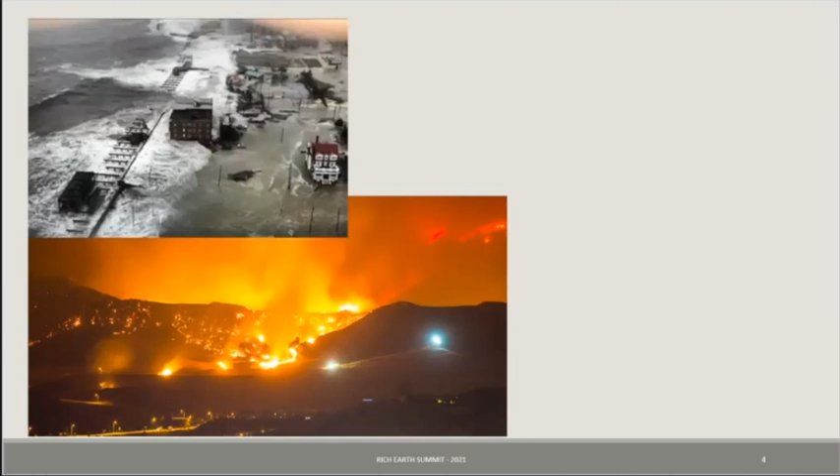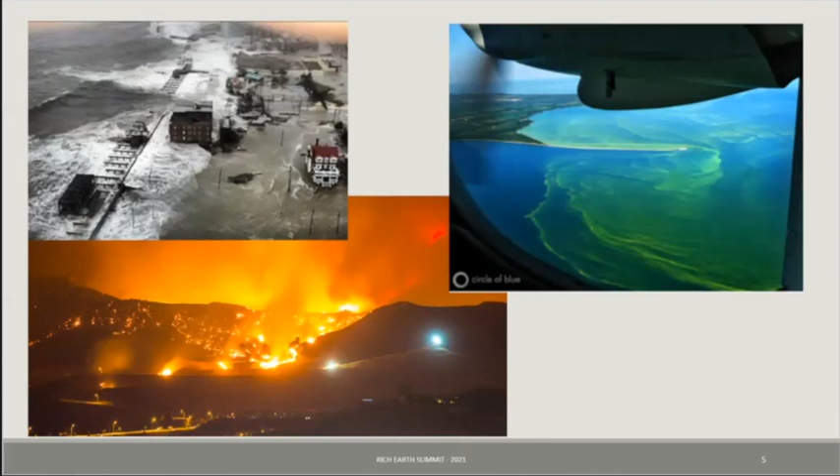And that of course stems from nutrients running off from farm fields, road surfaces, lawns, and from wastewater treatment, disrupting our fisheries, making it unsafe to swim, making it challenging for the drinking water. A number of years ago the city of Toledo had to completely shut down its drinking water because of the toxicity from these cyanobacteria.

And then you put this pandemic on top of all that. That has been disruptive for the way we work, for people's livelihoods, and has raised all kinds of uncertainty in our lives. And of course, we've lost many people. It's also put a new light on the wastewater sector and its role in public health, and how to use wastewater to help predict when coronavirus outbreaks are likely to occur, or where they're brewing.

We need to find solutions that solve for the complex equation all at the same time: for public health, for water scarcity, for nutrient balances, for affordability, for climate change. And that's hard. But I think the solutions that people in this group are looking at are in that vein of trying to solve problems without creating new ones.

So let me take a moment to put us in context of where we are starting from, at least in terms of our water and wastewater infrastructure. For most of the developed world, this is the way that we handle human excrement. And I want to be clear that I am not bashing centralized water delivery or sanitation. It has done a lot for humanity, and it is often cited as the driving factor that allows all of us to have cities and live in close proximity today.

Chlorination of city water and advanced wastewater treatment is what allows living as we know it today. But for all of its benefits, there are consequences, and we need to understand those consequences as we look for innovations that will solve some of these other problems that we have.

Now, let me explain this image we're looking at. On the left, you see the Deer Island Water Reclamation Facility, which serves the greater Boston area. I've got a map on the right of where that serves. The green and yellowish green areas are what's served by this wastewater treatment plant, also referred to as a water reclamation facility.

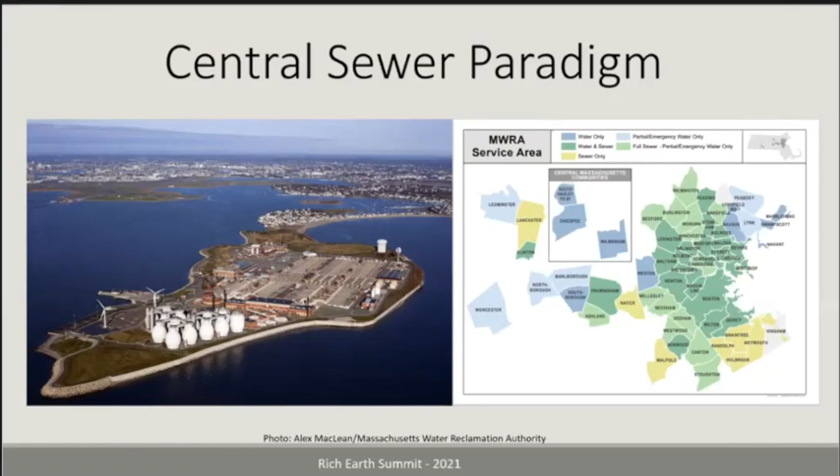On this image, Framingham's in the middle of the page, and that's about 30 miles west of this treatment facility. 30 miles is roughly, let me do my math fast, 45 kilometers or so, somewhere in there. And the treatment plant is out here. I don't know if you're seeing my cursor or not, but it's in the little part that sticks out into the water on the right side.

And it's kind of funny that it's called water reclamation, because in this particular case, this sits out in the bay, which eventually feeds into the Atlantic Ocean. And so the water is really kind of thrown away. What happens is that water in all parts of this sewer shed is pulled in primarily from groundwater and to some extent surface water, used in the homes and in businesses, and then it's sent out to Deer Island for treatment.

And because Massachusetts sits on the coastline, all that water then is put back into the ocean, where it's really, for all intents and purposes, unavailable. You'd have to put a lot of energy to get the salt and other constituents of the seawater out in order to give it back to people. So that seems like a waste.

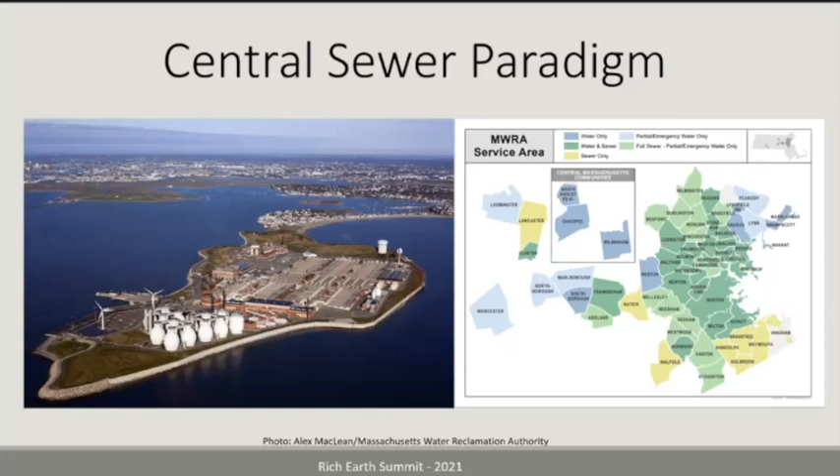Now, as I said, I'm not here to bash centralized sewer, but I do want to put in context some of the downsides of this, particularly around water, because I think that we're all people who share an interest in water. And I want to just drill into that a little bit. Now, here we see a very well-known image from NASA, and it shows we look like a water planet, with 71% of the Earth's surface covered in water.

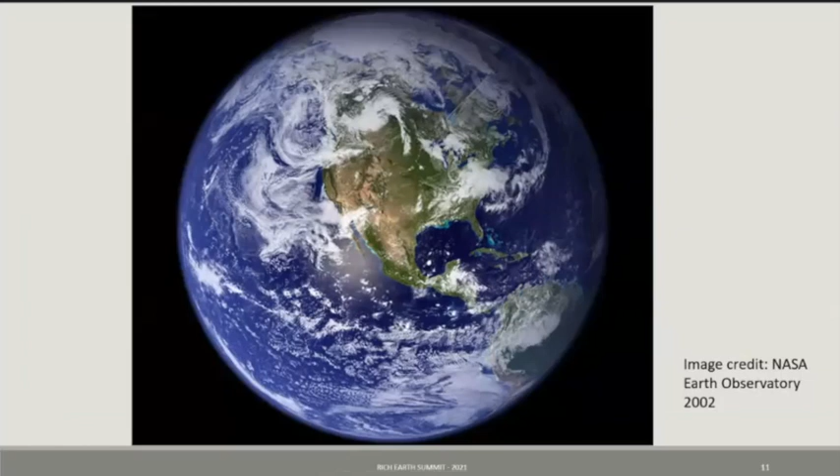But when you drill into that a little bit, and this image is from the U.S. Geological Survey, if we're thinking in terms of volume instead of surface area, it looks very different. The larger of those balls represents how much water by volume we have on Earth compared to the Earth as a whole. And that ball is about 860 miles or 1,400 kilometers in diameter. And that's all of the water on the planet.

The smaller ball to its right represents all of the fresh water on Earth. You can see how much smaller it is, but it would be a ball of about 170 miles or 275 kilometers in diameter. And then this little tiny speck below it represents the fresh water that is surface water and is available to us through rivers, streams, and lakes. And that little ball is only 35 miles in diameter, or about 56 kilometers.

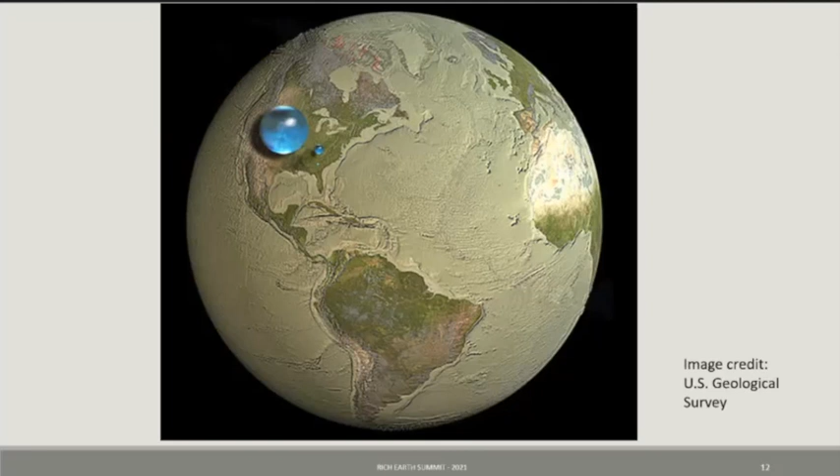In other words, yeah, we may be a blue planet, but there's not that much fresh water here for us to use. And it's just another way of driving home why we need to be so careful with the water that we use. And we need to question, do we want to use this precious water for transporting human waste, which is the way we use it in most of our cities today.

So just to summarize, some of the challenges with centralized water systems are, they disrupt the local hydrology, as I was trying to describe in that Boston example, but that's not unique to Boston. And of course, Boston and other places are working very hard to get that groundwater, what we call infiltration and inflow water, out of the system, but it's still there. This is a huge problem. It's sort of like in the US, we have this term called whack-a-mole, where you fix one problem and the next problem pops up.

So it's a never-ending problem of trying to keep that water out of the system. Large-scale transfer of continental fresh water to saline water bodies. And years ago, I saw a study that showed it is actually a measurable difference in sea level due to that transfer of continental fresh water, primarily groundwater, out to the oceans. It was, I forget exactly, half an inch or an inch, nothing compared to overall sea level rise, but it's measurable.

These systems are very energy intensive because we are pumping water long distances, and water is heavy. So that's true both of the water distribution systems and of the wastewater systems. And it uses a lot of water. They're built on the premise of having really infinite supplies of water. So that's a problem in a water-stressed world. They're very expensive to build, to operate, and to maintain.

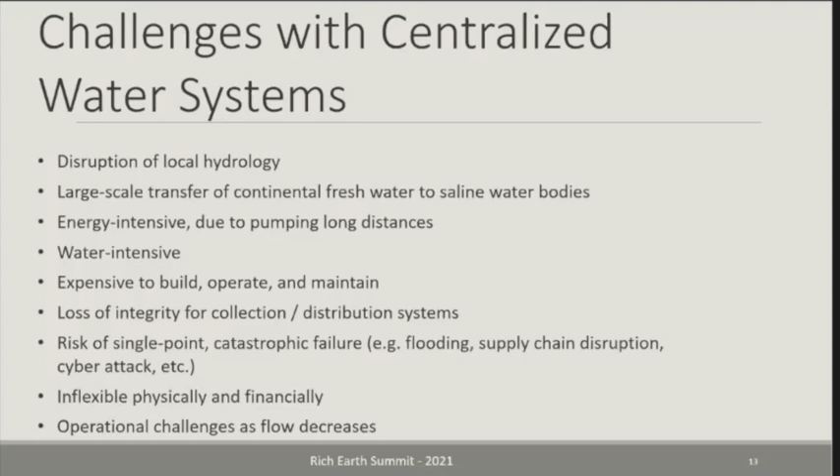We are also seeing, many of us predicted this for a long time, that supply chain disruption can have catastrophic impacts. During the pandemic, well, we're still in the pandemic, but in the height of some of the challenges with the pandemic, we saw communities in the United States and perhaps elsewhere asking people to conserve water because the ozone needed for treating water was needed at hospitals to create the oxygen for the COVID patients. So the ozone was in short supply, and we had a disruption of that supply chain. So COVID was affecting drinking water availability in a way that I certainly didn't predict.

Concerns about cyber attacks. This has already happened, where drinking water goes out because of a cyber attack. And certainly that could happen in the future. Just in general, these systems, because they're so big and they take so long to plan and so long to build, are really inflexible physically and financially. If you overbuild it, you can't downsize it. So people tend to build for a future that they anticipate, which doesn't always come through. And then the community is left holding the bag.

And now we are seeing that there are significant operational challenges in both water distribution systems and wastewater systems as the flow through them decreases. Water distribution systems are very dependent on maintaining chlorine residuals, and those chlorine residuals degrade over time. So if the water is sitting in the pipes for longer periods of time, it loses its integrity, and it may become contaminated.

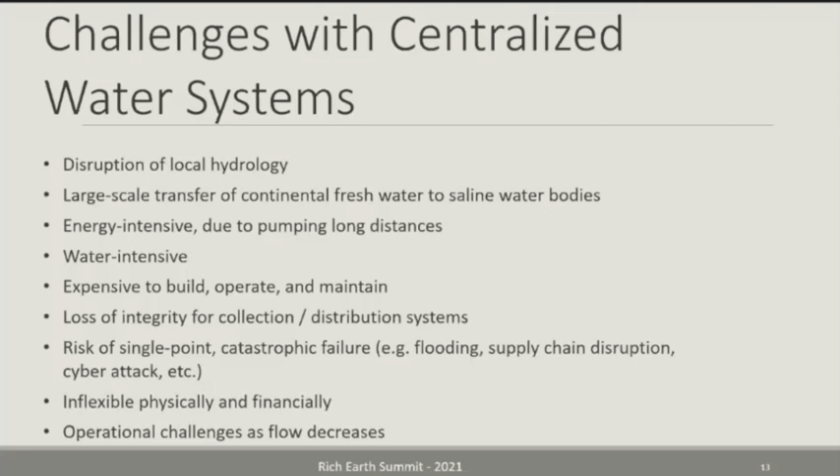In wastewater systems, we are definitely seeing challenges. I think these are good problems to have, but flow is decreasing because water use overall is decreasing, and we're getting more efficient. And then the wastewater stagnates in the system, and that can create system problems.

So shifting gears to think about how change happens and what is the change that's needed. Let me just give you some context for my background. In 2008, I had this incredible opportunity to go work for the Johnson Foundation at Wingspread. It's a small philanthropic foundation in Racine, Wisconsin, on Lake Michigan, about an hour north of Chicago. And they had what I would call a retreat facility. They don't like to call it that, but basically a facility for bringing groups of say 25 or so people together to work through problems.

And they have the money to bring those people together. And they had decided that they wanted to work on water problems. Now, you've got to picture 2008 in Wisconsin. Wisconsin has tons of water.

Water challenges are not really, it's not like living in California. And so it was kind of surprising in some ways that they chose to focus in on water, but they didn't really have a good sense of what the water problems were.

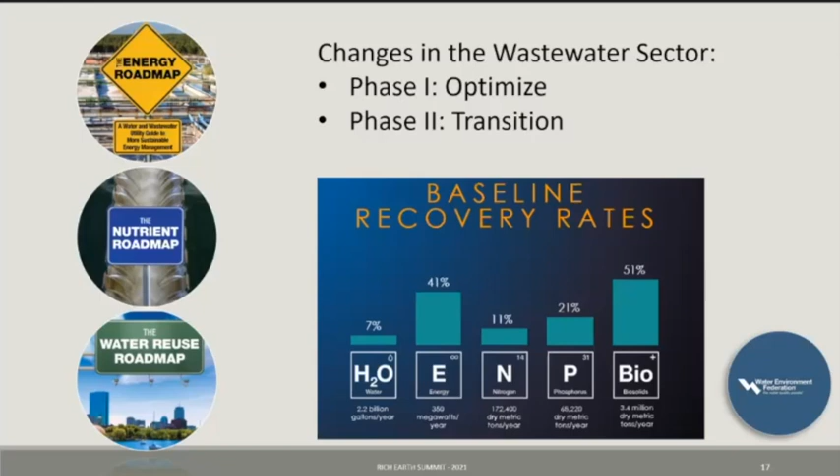And then starting to measure that. I'm not really going to drill into the particular numbers here, but the point is, if you want to do something, you've got to measure it. And so WEF has started surveying wastewater utilities on how much water, energy, nitrogen, phosphorus, and biosolids they are recovering from their waste stream. And the hope is that by highlighting these numbers and getting utilities to really measure this and report on it, that will help drive change.

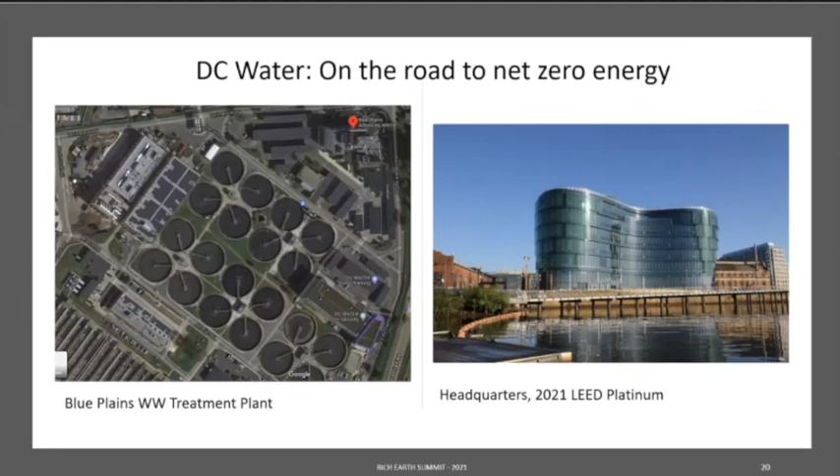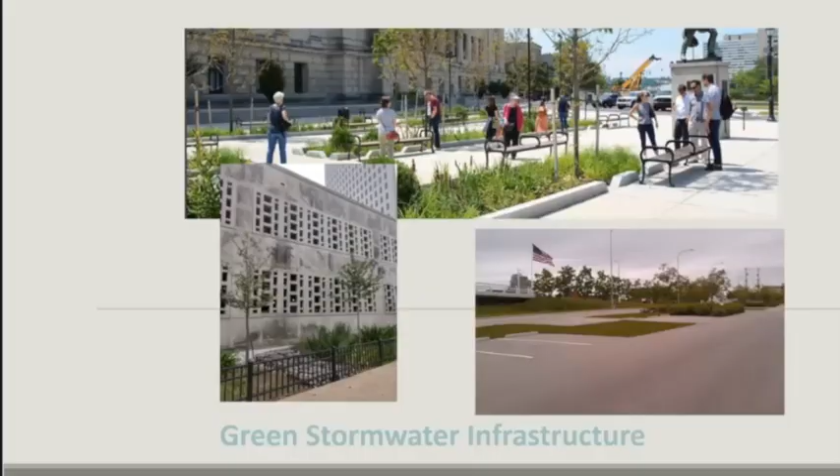And then at their new headquarters building, it's platinum LEED certified, and they've got all kinds of energy things there and water saving devices, including how to recover heat from their wastewater effluent. So my point is here that folks are trying to make change, and also, the use of green stormwater infrastructure, using natural systems to treat stormwater rather than sending that water to a centralized treatment plant. Just more examples of green roofs, green walls.

I put all of that in that kind of how to optimize the system. People are doing things, and that's good, and they will continue to do things, and they're being rewarded for that. But what are some of the things that are going to help get us into a new future that many of us are intrigued in seeing?

Well, there's been an increasing amount of work on what I call distributed water infrastructure. And the term is, of course, relative. Distributed compared to what? Distributed compared to centralized. And it can come in all kinds of sizes. A septic tank is a form of distributed infrastructure, or a rain barrel. But that's down at one end of the spectrum.

But in a community that maybe has 50 homes on septic, tying them together into one shared system, that might be centralized for them. But more and more communities are figuring out how to put some smaller scale treatment systems into their larger context.

And I want to use this time to kind of talk about terminology. I use this term distributed water infrastructure. Some people use decentralized to describe it. I prefer, and I know a lot of other people prefer, the distributed term, because I think it's really important that we not tee this up as one versus the other. Centralized is bad, distributed is good, or decentralized is good, because what that does is it sets up a false dichotomy and a false conflict between distributed and centralized.

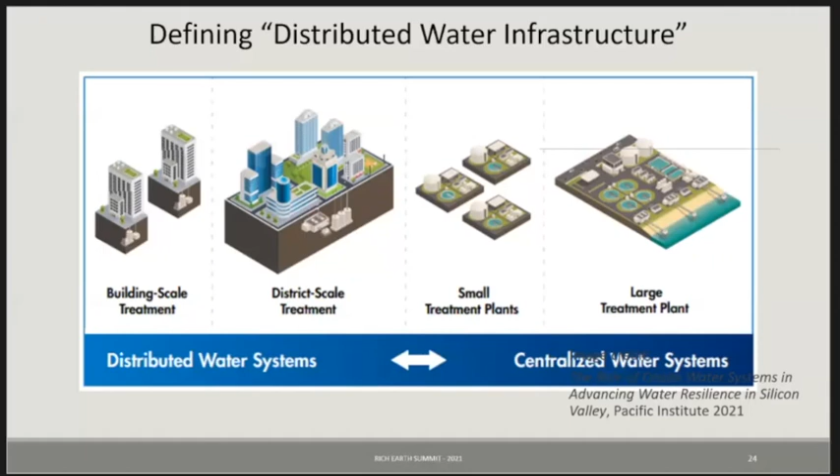Anyway, I just want to lay out this concept of distributed water infrastructure being a pathway towards the change that we want to see. There's been a lot of work being done in isolated pockets around the world. All my examples are US examples, but I know full well that there are other places that are further ahead. And I want to highlight what I consider to be the granddaddy of these systems, the Solaire building, the first residential high rise to be LEED Gold certified. As part of that, it treats its wastewater in the ground floor of the building. And this is really revolutionary.

I think we might have someone here today who is from or has worked with Natural Systems Utilities, who was behind this. This was put in place in 2003, and it has been working all those years, and now in New York City there are a number of high-rise buildings with these kinds of systems doing the treatment on site. They're still connected to the larger centralized system, but most of the treatment is happening in the building. The water is reused for non-potable uses, taking pressure off the collection system and off the water distribution system.

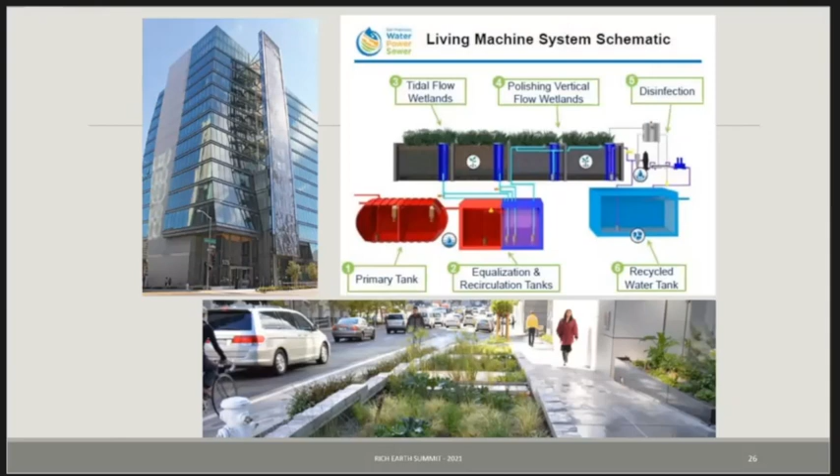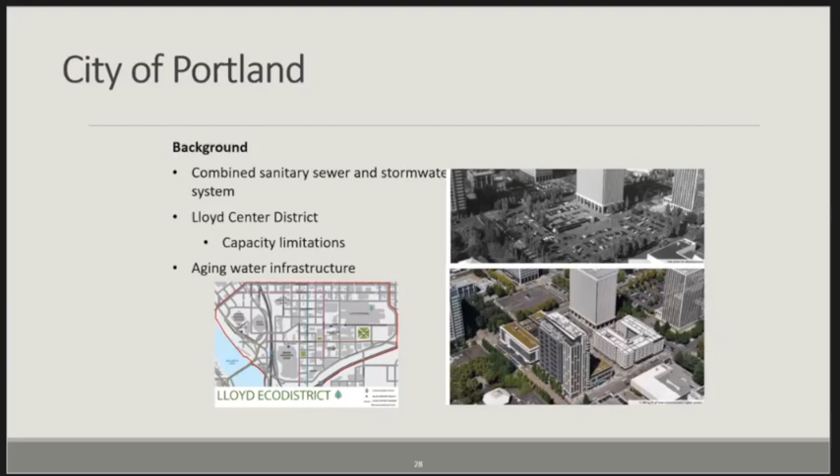So they worked with the developer and said, basically, we will give you a refund on your development fees if you build a system that doesn't tie into our collection system. This Lloyd Eco District resulted in a project called Hassalo on 8th, four city blocks, most of it had been parking lot. It now has three multi-use residential buildings, green roofs to help with stormwater, and these red systems are trickling filters that treat the wastewater with a series of treatment wetlands, taking care of virtually all the treatment and allowing water reuse on site. The solids are trucked to the main treatment facility periodically.

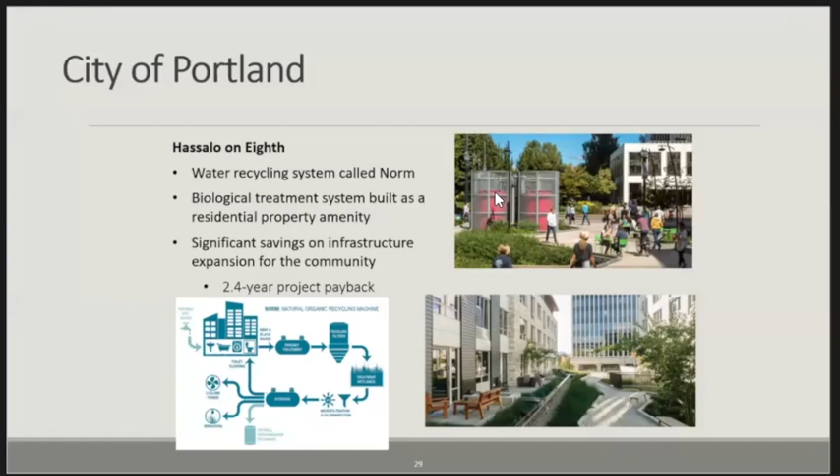So as you can see, it has a 2.4 year project payback. That was because it was in the city's best interest to encourage this type of development. I don't know to what extent we'll see this in other cities, but I think this is a really great example of how we're starting to see this sort of innovation in the context of a more standard collection and treatment system.

I also want to do a light touch with smart technologies. You may not think of all this digital stuff as water infrastructure, but it's a key component to allowing us to rethink the way we do water infrastructure, because if you have distributed systems, you can't have somebody on site paying attention to them all the time. As we increase our ability to monitor and manage from afar, that opens the door for distributed infrastructure. So how do we get to the stage of really transforming our systems?

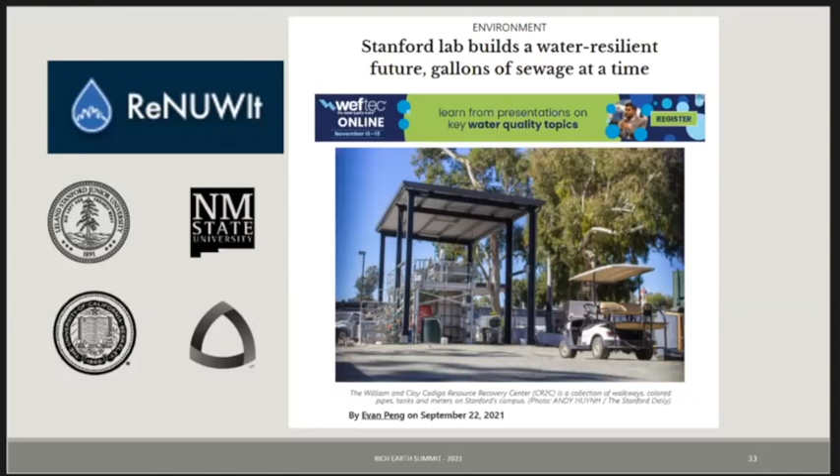There are entities out there that are really working on how to have a transformative approach to water infrastructure. And I highlight ReNUWIt, which is a collaboration of Stanford, New Mexico State University, UC Berkeley, and Colorado School of Mines. ReNUWIt stands for Re-inventing the Nation's Urban Water Infrastructure. And they have been going gangbusters in developing new technologies and new concepts, really helping us to reimagine how we could do water infrastructure.

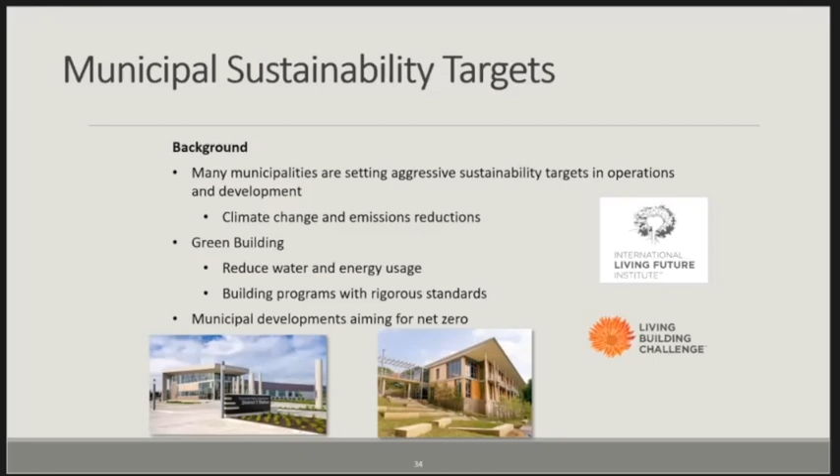Cities with sustainability targets are laying out more aggressive timelines for some of these changes. And so whether it's using standards developed by the Living Building Challenge or the International Living Future Institute or other similar paradigms to aim for net zero buildings, those are starting to really take hold of the imagination and help give cities tools for how they might transform their water infrastructure.

I use Austin. Austin is in Central Texas. It has a decent amount of rainwater, but it primarily relies on surface water for its water supplies. And it has just been growing like gangbusters for the last 20 years, and is projected to keep doing that into the future. And they have created their innovative Water Forward plan. It's their 100-year plan.

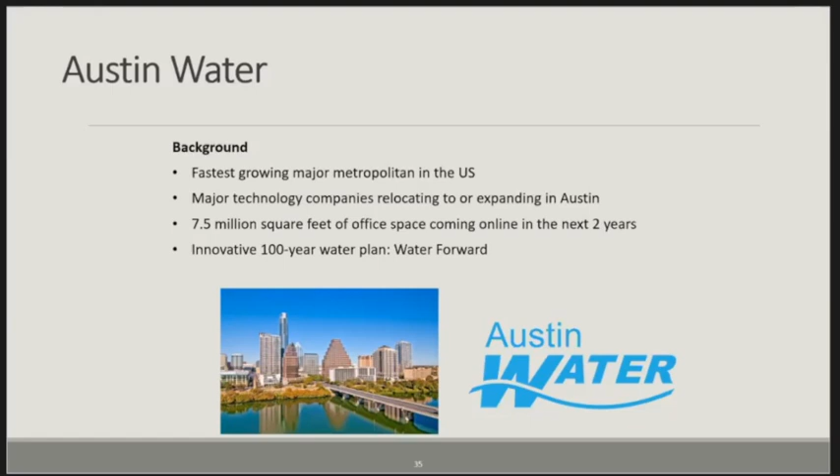They have set really aggressive targets for being able to recapture water from rain, from treatment of wastewater, from building drains, foundation drains, all those sorts of things, to really decrease the reliance on their centralized water distribution system. They see this as essential to their survivability. And when you get a plan like this that is so all-encompassing for a city, it's going to have transformative effects on how the water infrastructure overall works.

The Bill and Melinda Gates Reinvent the Toilet Challenge from 2011: the goal here was to create toilets that can handle human waste, can work off grid for very little money and little to no energy input. This has captured the imagination of inventors and innovators all around the world, and how we can really rethink our toilet.

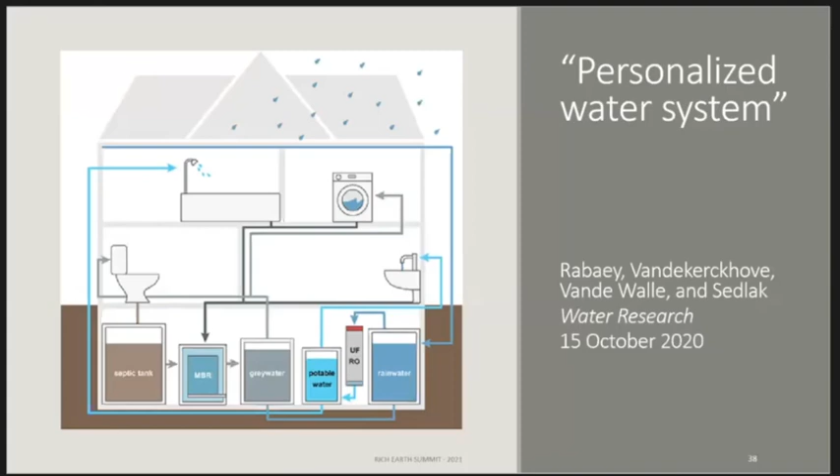David Sedlak and colleagues last year put out a concept, this personalized water system. It's really just conceptual, but this is one of the things coming out of ReNUWIt. And maybe we won't really be building houses just like this, but to get people thinking about how can you have a largely or entirely off-grid house, and do this not just for the people here who are sort of extreme innovators, but for the public as a whole. How do you make it easy for them, turnkey for them, so that they don't have to think about it?

How do we completely change the paradigm around nutrient recovery from wastewater? There are a couple of different technologies here, but this particular one recovers phosphorus in the form of this chemical brushite we see off to the right. And then they can sell that as fertilizer. In their case, it's really marketed at the general public rather than agriculture as a whole. But they are really rethinking how can we do that.

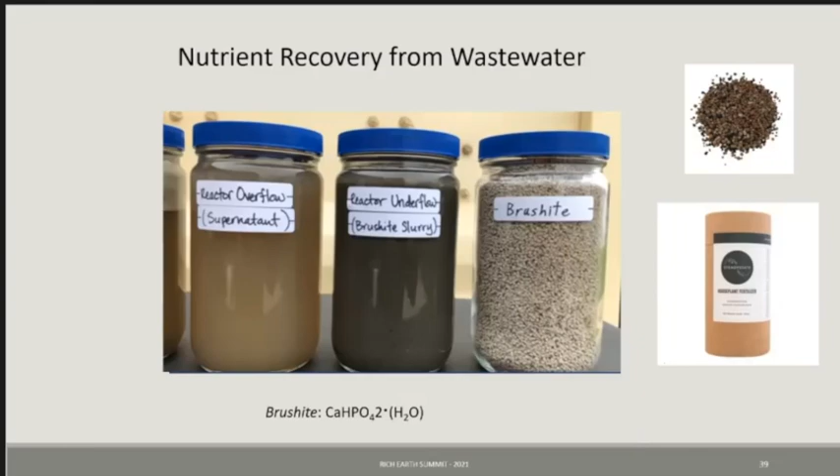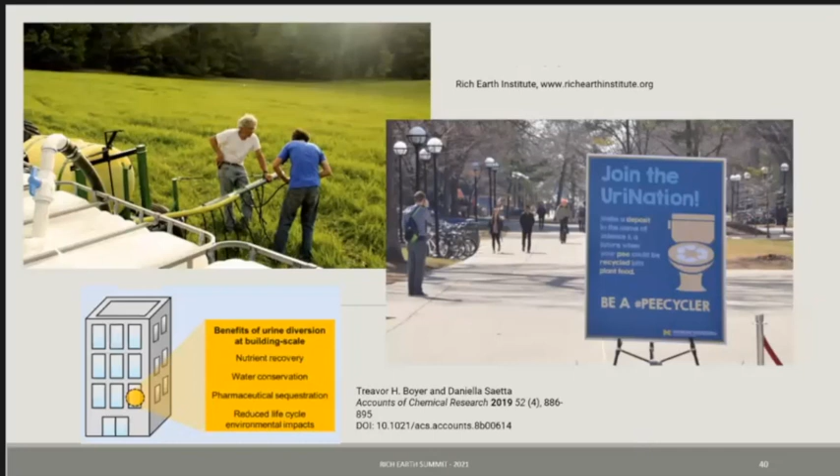And of course, in terms of really innovative stuff, we've got the Rich Earth Institute. And I think that the Rich Earth Institute and its collaborators really define what I like to call the bleeding edge of innovation, really getting us to rethink how we might be able to reimagine our infrastructure. But how do you make the change? And how does change really happen?

And then the early majority adopters, they were a bit more conservative, but still open to new ideas, and they were able to influence their neighbors, and then eventually, everybody else came along. So Paul O'Callaghan, who's founder and CEO of BlueTech Research, studied how this applies to the water sector. And he found that for a new technology in the water sector to successfully move from bench into that early adoption phase, took a bit longer than we might hope, about 11 years.